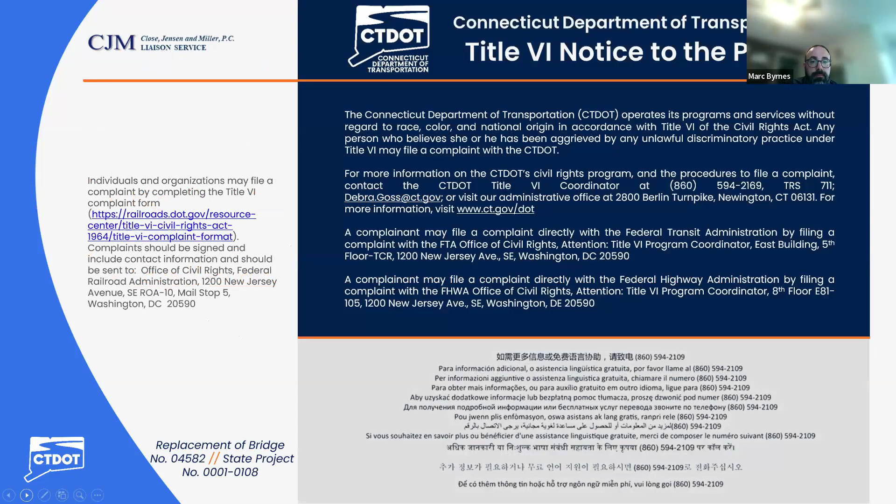Funding for this program is through the Federal Local Bridge Programs Design Managed by State, or DMS program. In the past, bridges under the Federal Local Bridge Program were funded 80% federal, with federal funds, and 20% municipal or town funds for design, rights-of-way, and construction. In the Design Managed by State, or DMS program, design, rights-of-way, and construction phases are funded with a minimum of 80% federal dollars and up to 20% state dollars. Design is at zero cost to the town.

Now, despite the department taking over the design, it is still a full partnership with coordination with the town, and we solicit their input at major project milestones such as this one.

The goals of the DMS program were to provide a streamlined approach to design using full DOT resources, aid municipalities in keeping their bridges in a state of good repair by effective use of funds, and to decrease typical design time of upwards of 60 months to 36 months. And when possible, utilize accelerated bridge construction, or ABC techniques, to shorten construction duration.

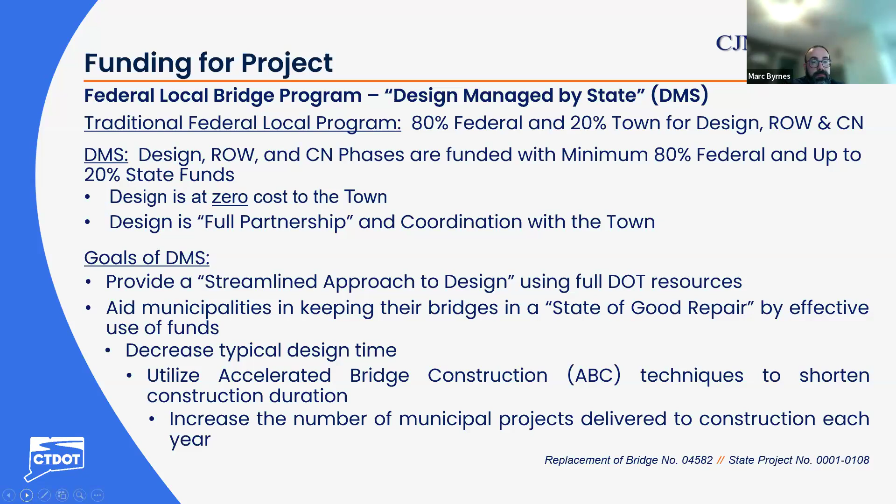I'll now quick turn over to some remarks from Eric Anderson, the town administrator for the town of Andover. Eric. You might be on mute, Eric.

Thank you, Mark. On behalf of the town of Andover, I would like to thank DOT and specifically Marc Byrnes, as well as Close, Jensen, and Miller for their help of the town of Andover in this project. As most of you know, small towns have very limited resources, and the ability to work with the state to bring a major bridge project through to completion is a really wonderful thing.

So we're very fortunate to be in the design managed by state plan. And we're quite fortunate to work with Tom Weldon and the team at DOT to pull this off. So with that said, I turn it back to you. Thanks, Mark. Thank you, Eric.

I'll now introduce the project team between the department and the department's liaison engineers, Close, Jensen, and Miller. Bart Sweeney is our division chief of bridges. Derek Lassard is the principal engineer of the consultant bridge design unit. As I said, my name is Marc Byrnes, I'm the project manager. Michelle Rain is the project engineer from the department. And then representing Close, Jensen, and Miller are Jim Platosh, project manager, and Bob Cosker, liaison engineer.

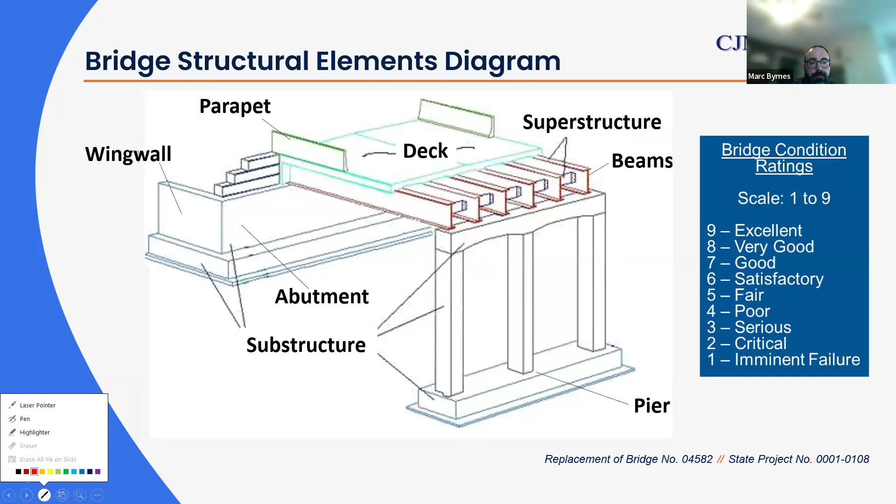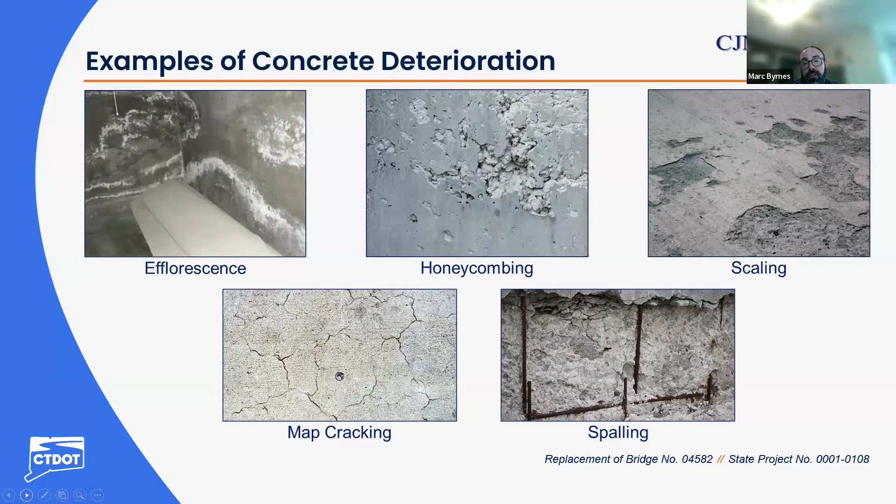My name is Bob Cosker. I am a project engineer, liaison engineer with Close, Jensen, and Miller, and our role is to administer and provide technical support to the Department of Transportation.

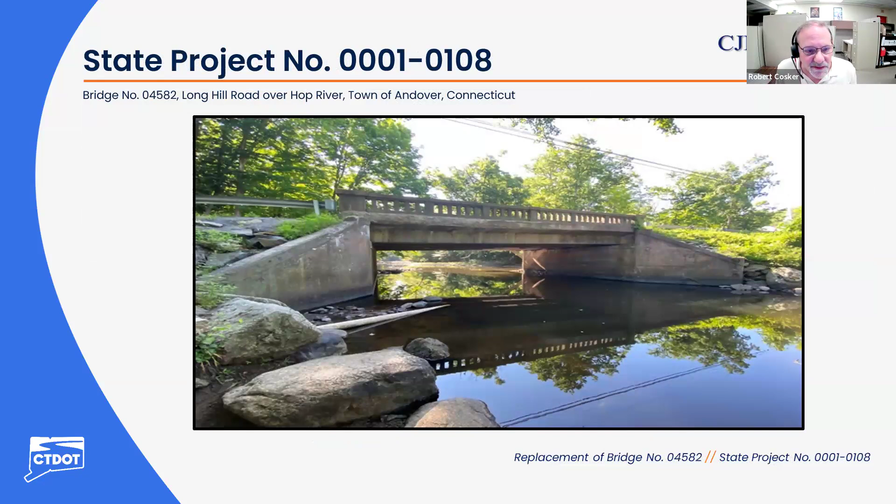I'm going to define the purpose and need of this project right now. Basically, it's to address the structural deficiencies by replacing this 90-year-old bridge, and to provide a bridge that's in a state of good repair. There are also some hydraulic efficiency issues with this bridge's ability to pass the flow of Hop River, and we also want to provide a bridge that is stable for predicted scour.

Scour, in a nutshell, is a localized loss of soil or channel material around a foundational element. It's usually caused by turbulent, high velocity water flow, or swirling action of the water. It's actually the most common cause of bridge failure in the United States — I read that more than 60% of bridge failures are caused by scour issues.

The need for the project is that the reinforced concrete deck is in poor condition, and as Mark was explaining, it received a condition rating of 4. As I just spoke about, the structure is scour critical, which basically means the foundation is susceptible to undermining and isn't stable for predicted scour conditions. So we want to address that issue.

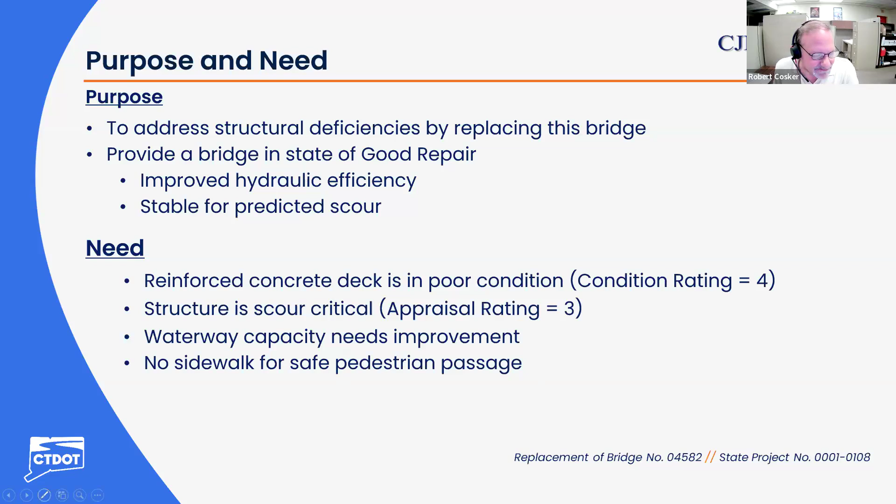Here's a map of the project location. It's about 550 feet north of US Route 6. It is classified functionally as a rural local road, so it basically serves the local community.

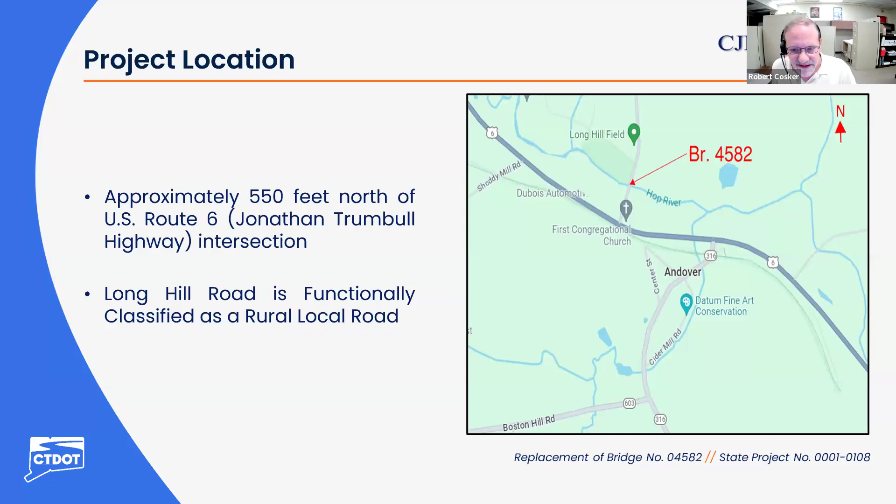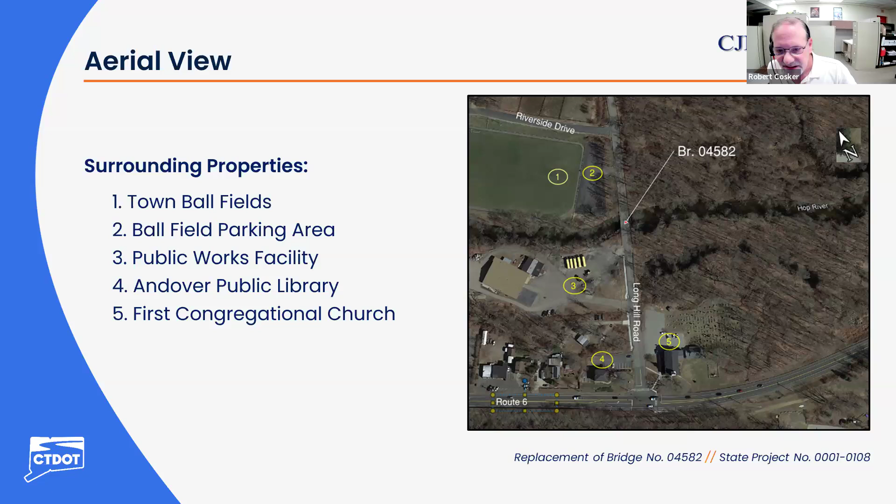Here's an aerial view of the site with some of the surrounding properties noted. Almost all of them, except for the 5th noted here, the Congregational Church, are town facilities. Long Hill Road runs north and south, and Hop River flows from west to east. The area east of the roadway and bridge is primarily wooded floodplain.

Just a little history on the bridge and the existing conditions. It was built in 1934, so it's 90 years old. The type of bridge is a reinforced concrete T-beam superstructure, named for the shape the concrete beams took when erected, with a poured concrete deck slab on top, all overlain with bituminous concrete or asphalt.

The abutments and wing walls, which are part of the substructure, are also reinforced concrete. The span of the bridge is 40 feet across the river, and the total from back of abutment to back of abutment is about 43 feet. The bridge provides a 30-foot wide curb-to-curb roadway width, basically 15 feet for each direction of traffic. There are currently no sidewalks on the bridge. There's a concrete parapet that is open.

The bridge carries an average daily traffic, abbreviated ADT, of about 400 vehicles daily. Posted speed limit out there is 30 miles an hour. We've got quite substantial right-of-way out there, 80 to 100 feet wide at the bridge, so about 40 to 50 feet on either side of the roadway center line.

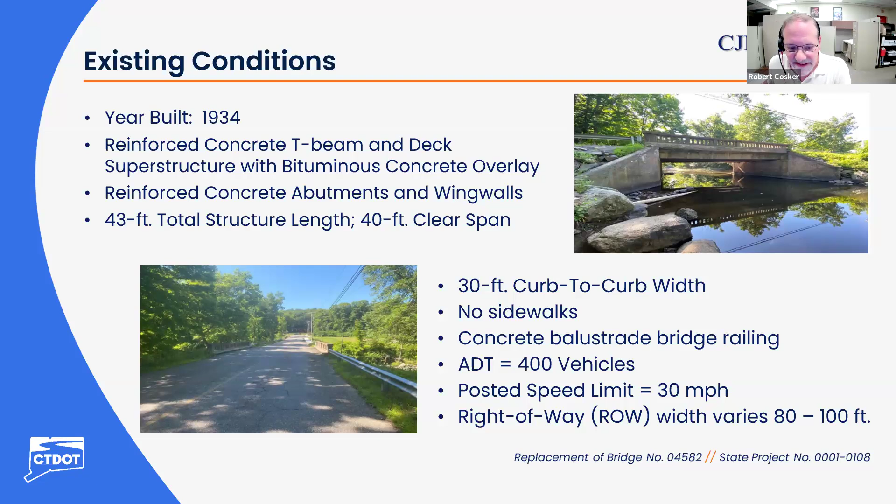Utilities out there are located on the west side of the bridge, as shown here, consisting of electric distribution wires, telephone wires, and cable television wires.

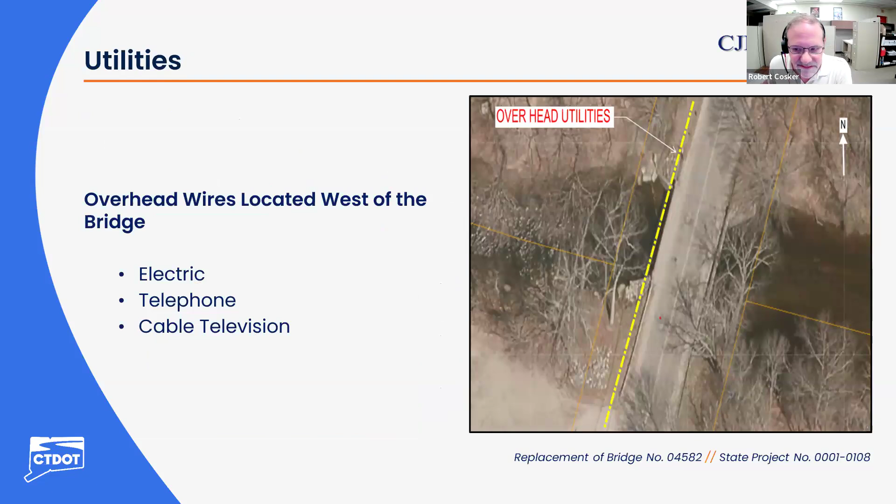Going to go through briefly the various components of the bridge itself and some of those ratings that Mark identified earlier. The approaches are basically just the roadway adjacent to either side of the bridge. That is rated a 6, satisfactory condition. Basically, it has some substandard guide railing, and the approach pavement, as you can see, is in pretty poor condition.

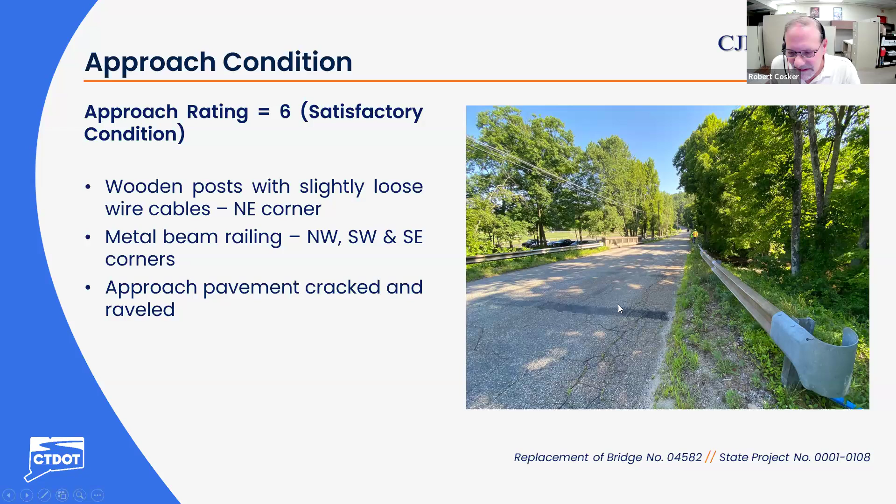The driving deficient element for this project is the reinforced concrete deck. It's rated as poor, and I can list all the specific defects, but I think the picture here tells the story better than anything. I believe that's the northwest corner of the bridge, and you can see that the deck itself beyond the bridge railing is just kind of crumbling.

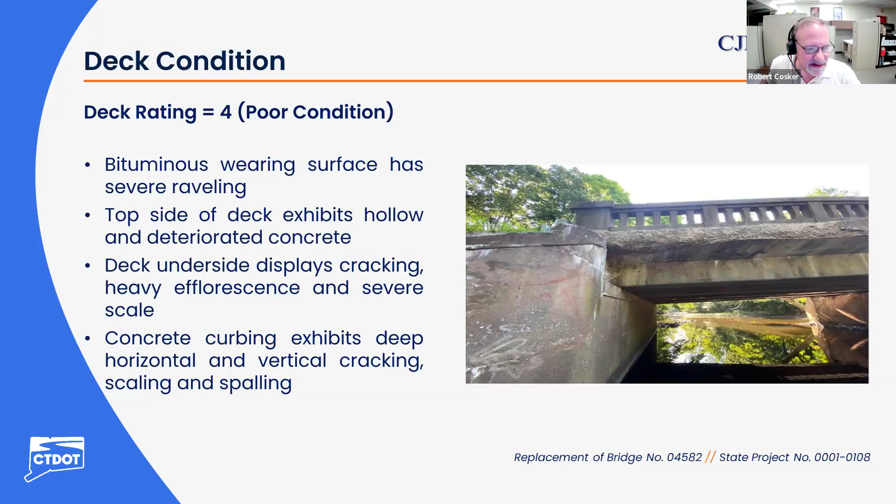The superstructure, the beams which support that deck, are rated in fair condition. However, as you look at the photograph, the deterioration is advancing. There's lots of cracks, scaling at the water line. Basically, all of that concrete deterioration that was highlighted previously, you can find it here. So it's a short progression from the fair condition it's in right now to being in poor condition, similar to the deck.

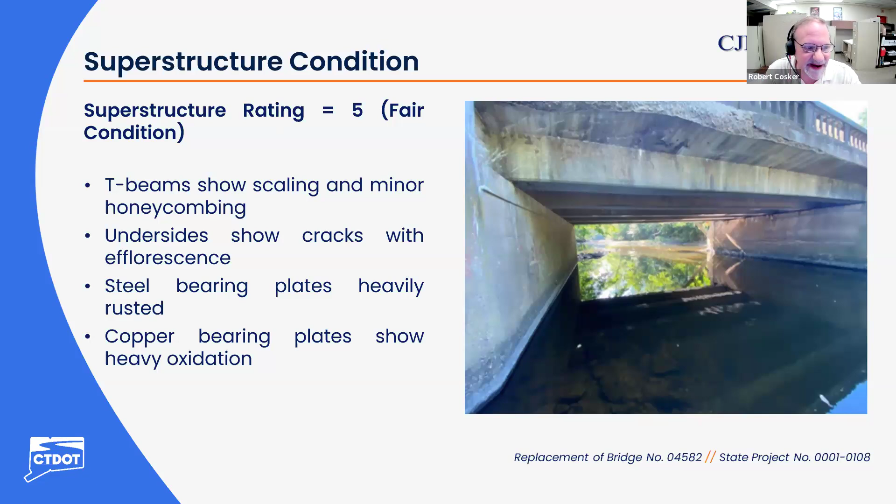And the substructure, which includes the abutments and wing walls, they're also in fair condition, but similar to the superstructure, the deterioration is advancing, and that could very easily become a 4, poor condition rating. They are 90 years old, and for that age they've held up well, but they've just kind of outlived their life expectancy. Here's just some more photographs of the substructure and some of the deterioration that's present there.

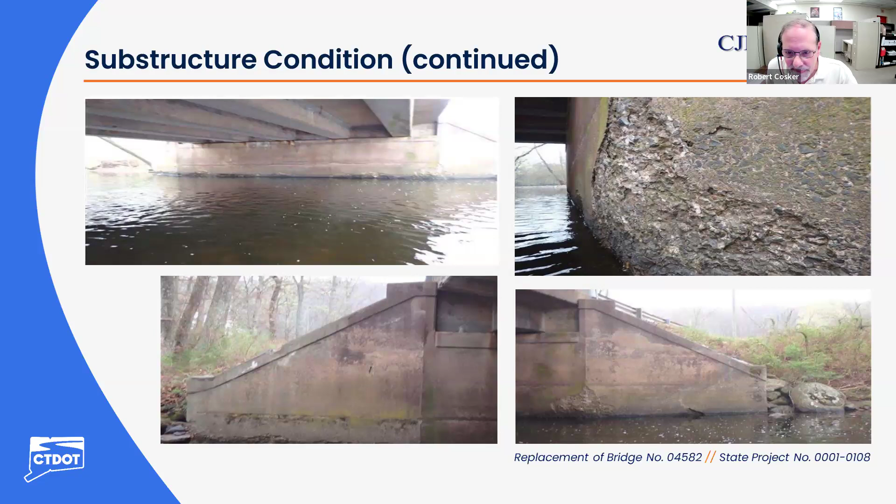The condition of the river channel is also rated. It's rated a 5, which is fair condition. And as I've discussed before, the scour rating is 3, which makes it scour critical.

There's quite a bit of evidence of scour on the embankments. There's also some buildup of sediment that is actually removed from the channel as part of the scour mechanism. And there's a lot of scour present at the center line of the channel through the bridge and along the south abutment. There are some pretty sizable scour holes.

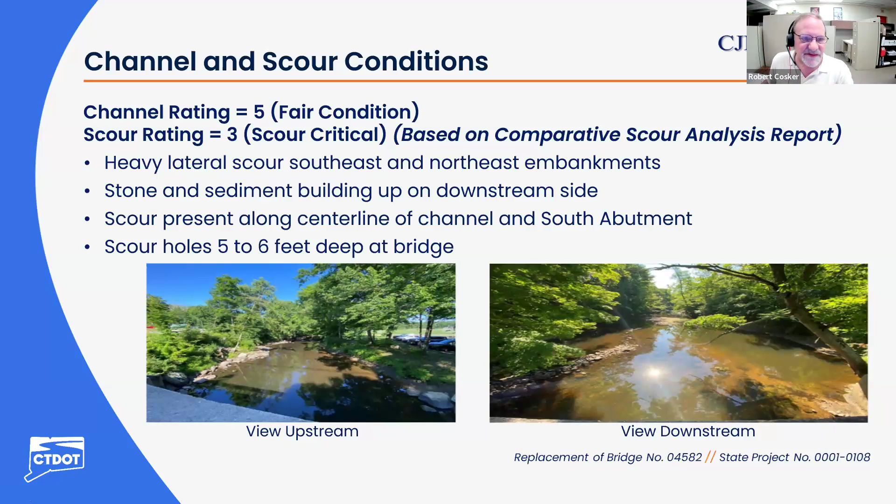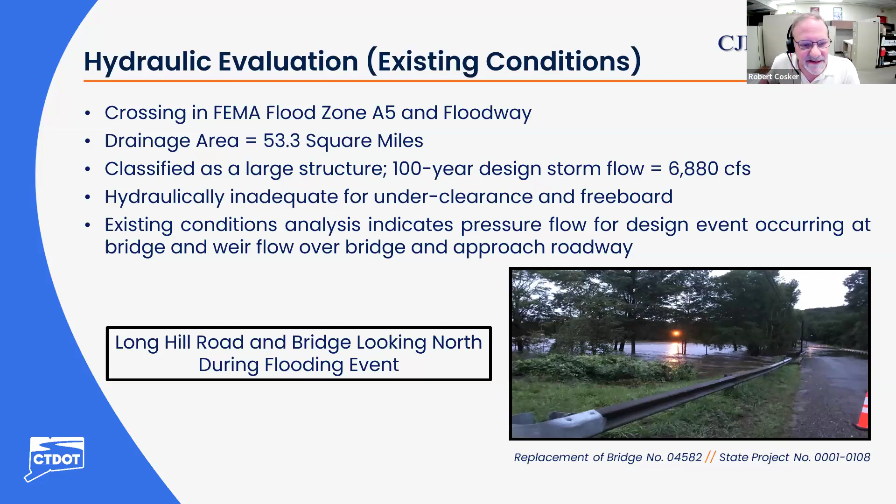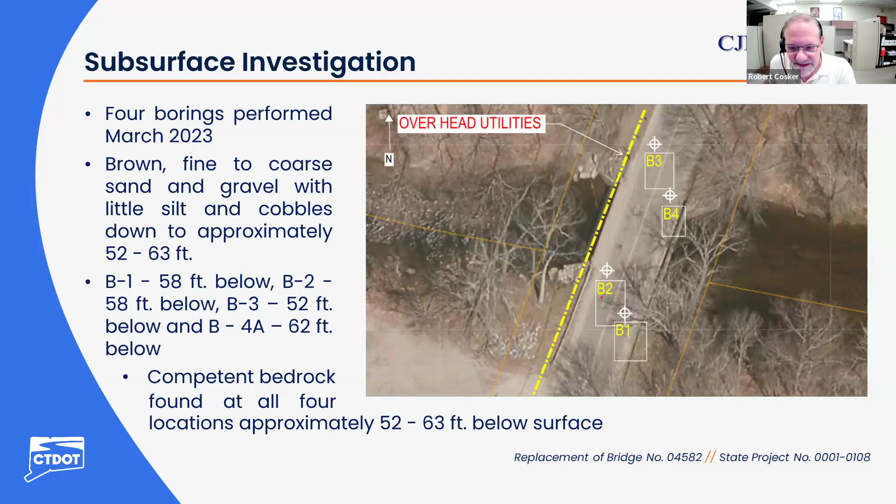So we performed a subsurface investigation to determine the consistency of the subsurface. What we found was that bedrock is present at all 4 of these boring locations, between 50 and 65 feet below the roadway surface. So we do have some good foundation material present at the site.

They're precast and can be placed rather quickly. On top of that, there is a concrete shear slab, and the beams themselves are protected from water intrusion by installation of a waterproofing membrane and asphalt on top of that. There's a 3-inch layer.

As I said, the shear slab itself protects the primary beams from water infiltration. It also protects it if you have to replace the pavement on the bridge, you may have to mill it off and then repave. So it protects the beams themselves from being damaged by any milling and paving equipment.

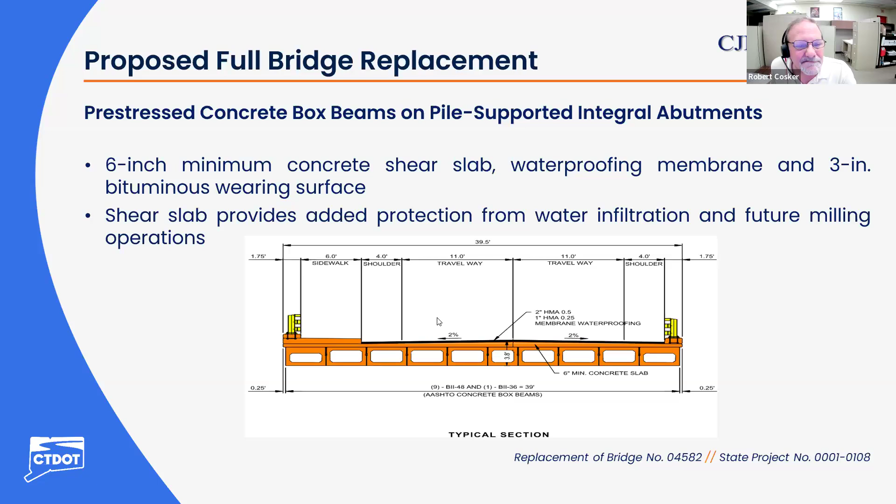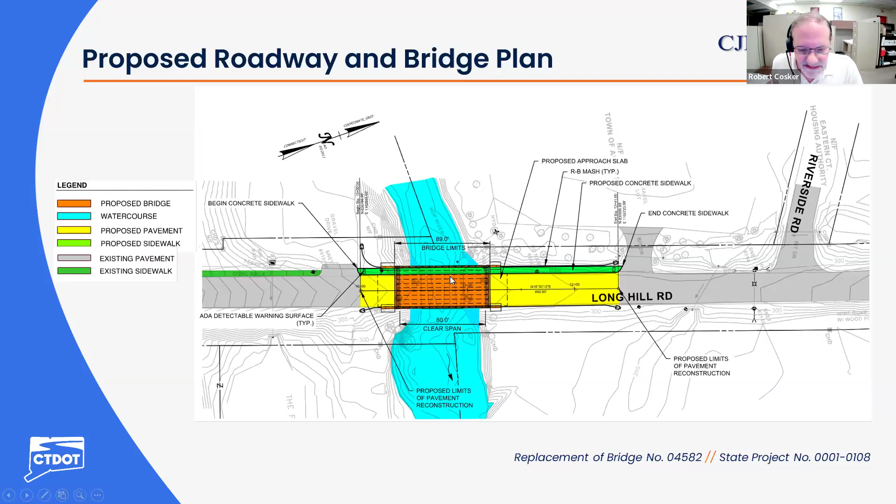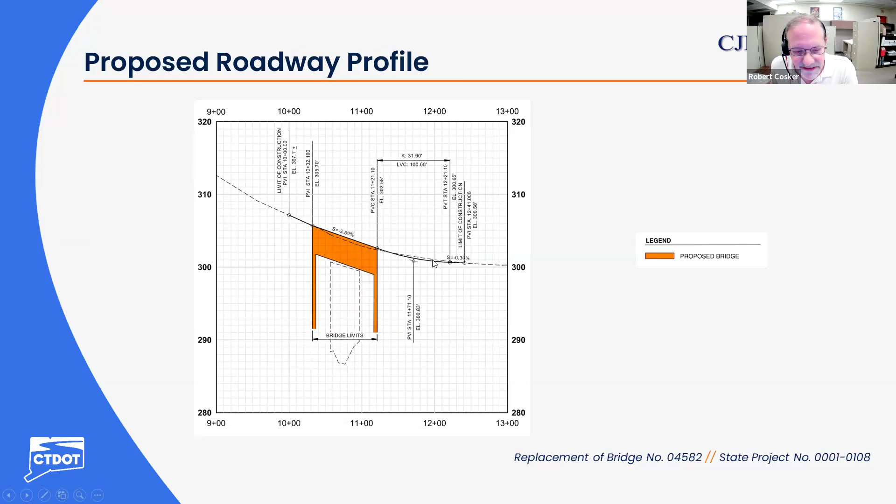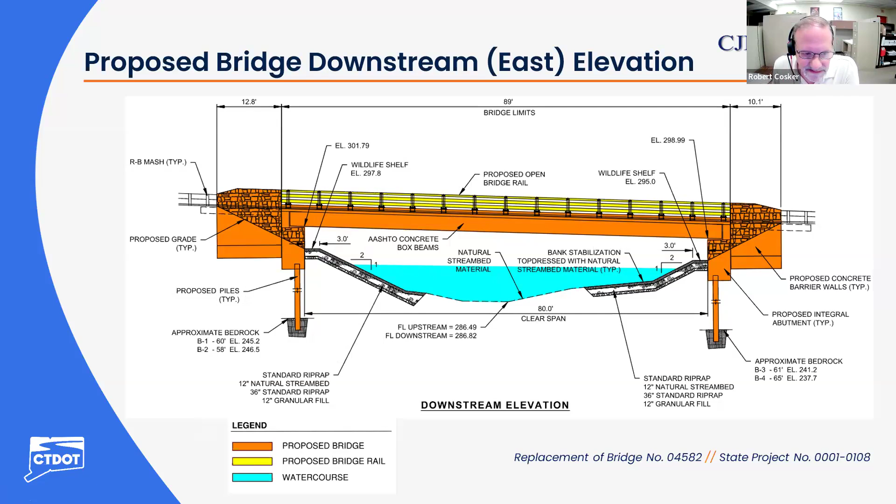By replacing this bridge, I want to point out some of the improvements we will achieve to the current hydraulic condition. We're making the opening quite a bit larger than the existing, doubling it. That will alleviate the current pressure flow at the bridge. Pressure flow being that the underside of the superstructure, the horizontal top part of the bridge, there's actually water that wets the structure itself.

So we've eliminated that for our design storm condition, and we've improved the overtopping such that it doesn't occur so frequently. And we are going to provide a bridge that is stable for predicted scour.

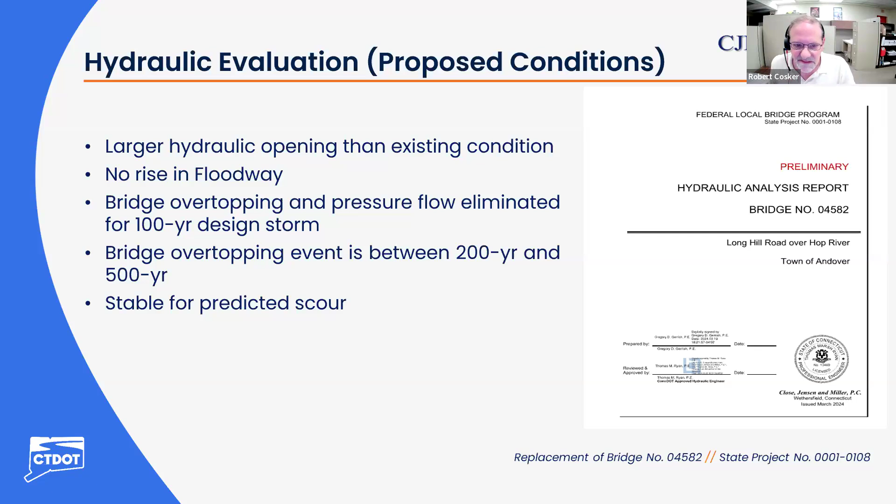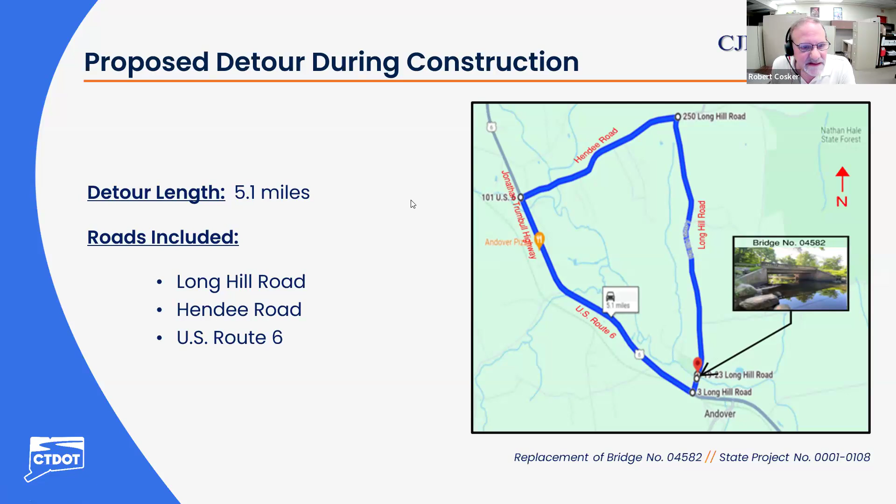In order to construct the replacement bridge, we are going to close Long Hill Road at the bridge and implement the detour shown here. It's a little over 5 miles long and includes Long Hill Road, Hendee Road to the north, and US Route 6.

Permit and environmental considerations associated with the bridge replacement project: the permits we expect are an inland wetlands and watercourses commission permit from the town of Andover, and flood management certification from the Connecticut Department of Transportation, under a memorandum of understanding with Connecticut DEP for issuing flood management certification for municipal projects with state and federal funding. It's intended to streamline and probably accelerate the ability to procure permits.

Also, a U.S. Army Corps of Engineers general permit will be required. A couple of associated aspects related to permitting that we know now: we've consulted the Connecticut DEP Natural Diversity Database, and we found that there are quite a few species that are either of special concern to the state, and one that is on the federal endangered list.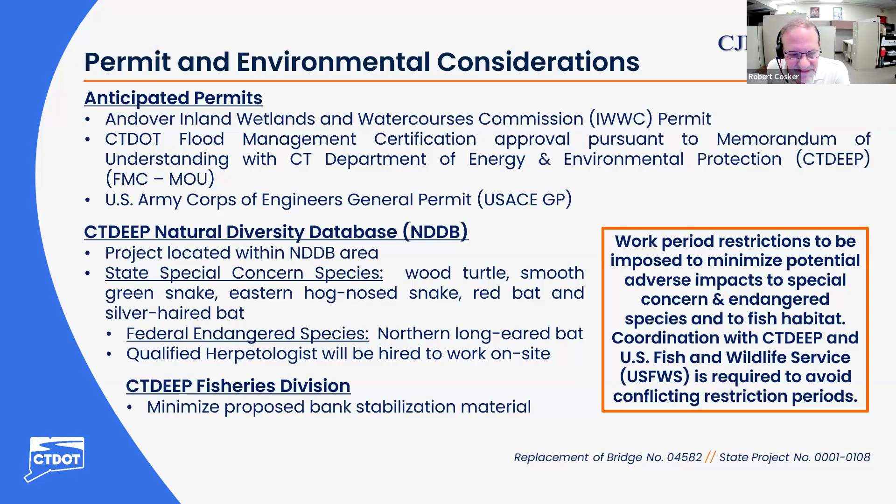Just going to wrap up with the estimated construction cost at this point, the schedule, and some final presentation remarks. The replacement of the bridge, the project is anticipated to cost about $4.1 million.

That amount includes not only the physical construction work, but it also includes incidentals such as construction inspection costs, oversight by the state DOT, materials testing, things like that. So all told, it's about $4.1 million at this point.

The duration of the project, we anticipate to be about 6 to 8 months, with a start scheduled for the spring of 2026 and an anticipated completion in the fall of 2026.

Just to close out, as part of the construction, we will need to relocate those overhead utilities on the west side of the bridge to ensure that we have clearances for various construction equipment and so forth. And I mentioned earlier, but we're very fortunate that we don't need any rights of way acquisitions, because there is so much available town right of way here.